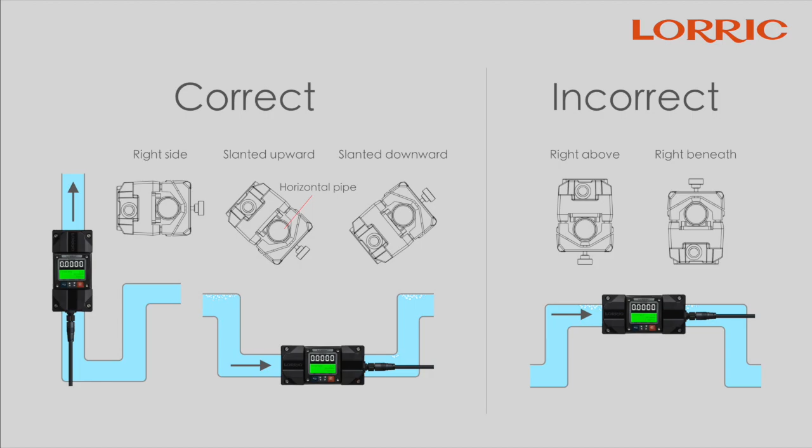First up here is our recommended installation location. During installation, correct positioning is crucial. Whether you're dealing with vertical or horizontal pipes, our Flowmeter has you covered. For vertical pipes, simply choose a pipeline with a flow from bottom to top. As for horizontal pipes, select a position where the pipe is filled, such as a lower spot in a diagonal pipe.

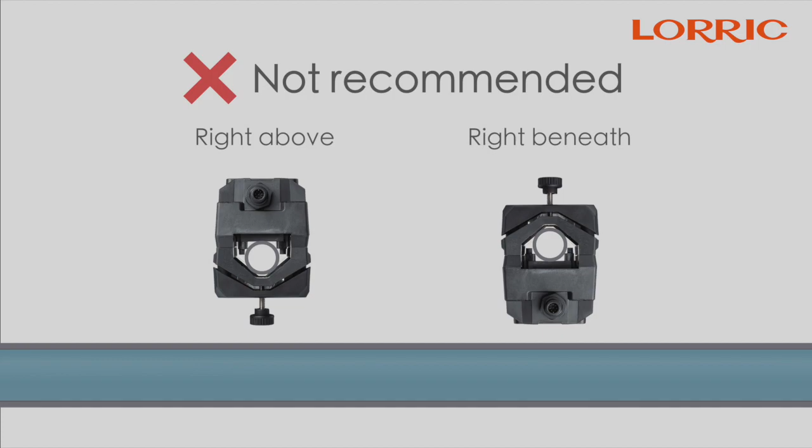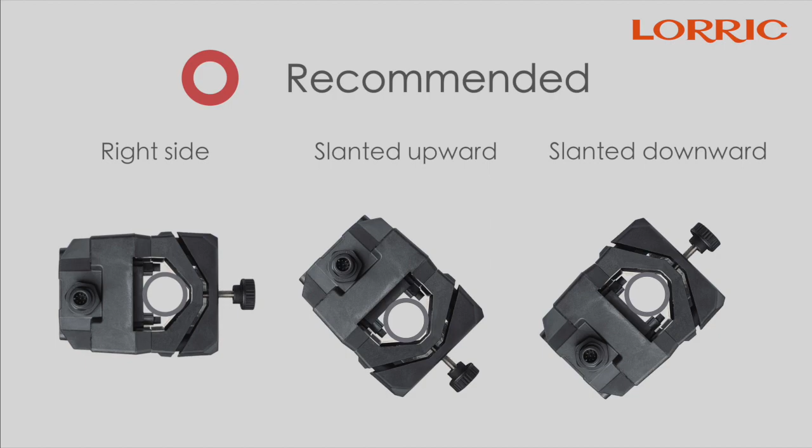Avoid placing it directly above or below the flow to eliminate intrusion from pesky air bubbles and sediments. For optimal performance, we recommend these positions: on the side, slightly above, or slightly below the pipe.

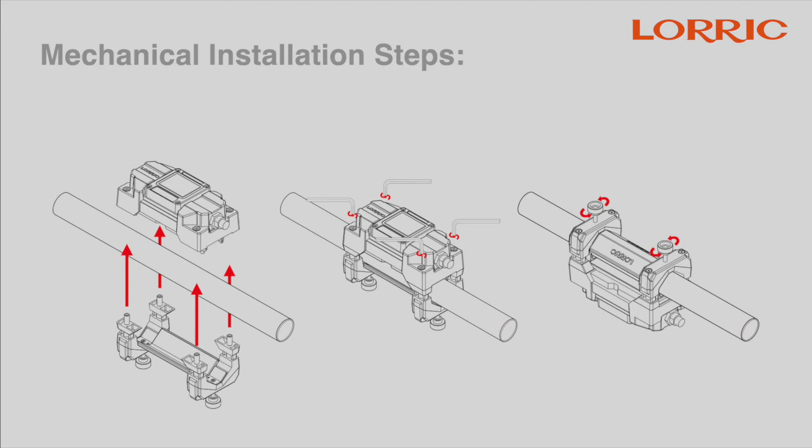Next up here is our mechanical installation steps. It will only take you 3 steps to finish the whole mechanical installation. When installing on larger diameter pipes, remember that the larger the pipe, the more prone it is to deformation. Carefully select an appropriate installation location. Prior to installation, ensure that the clamp is in the loosened position.

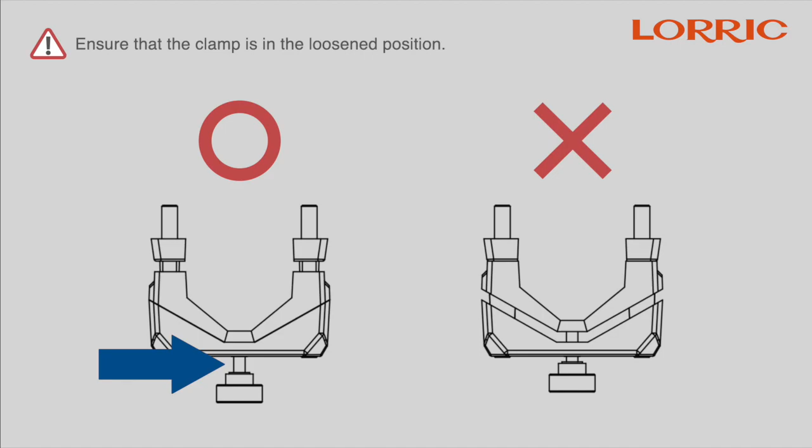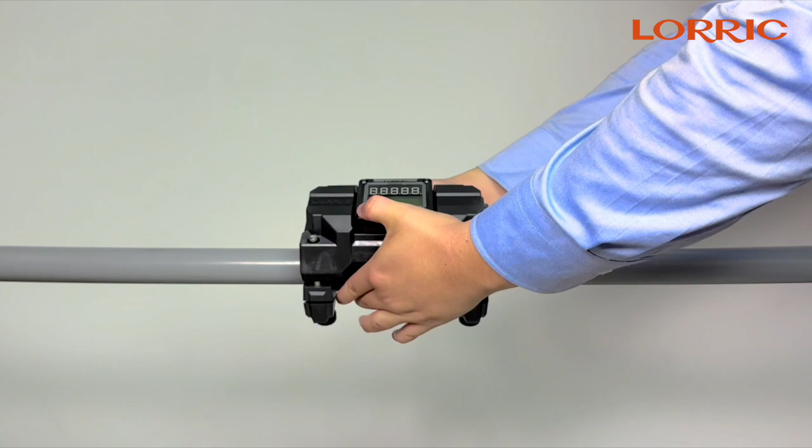Step 1. Clamp. Once you have identified the right installation spot, securely attach the EchoSense Ultrasonic Flowmeter by clamping the upper and lower brackets around the pipe. During installation, avoid applying excessive force to the device body to prevent any risk of damage.

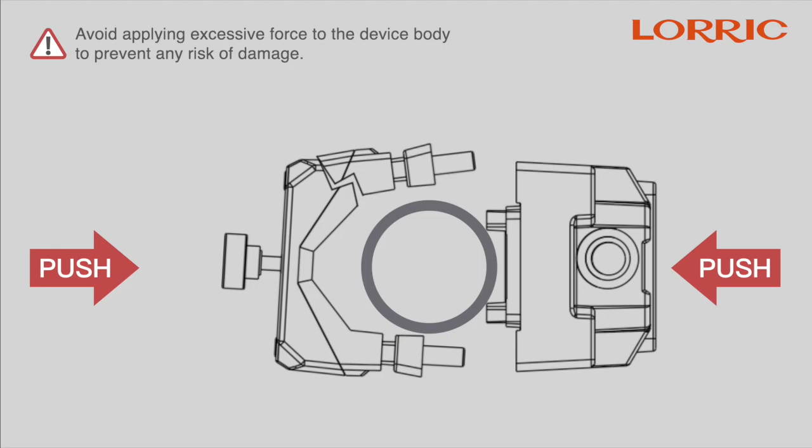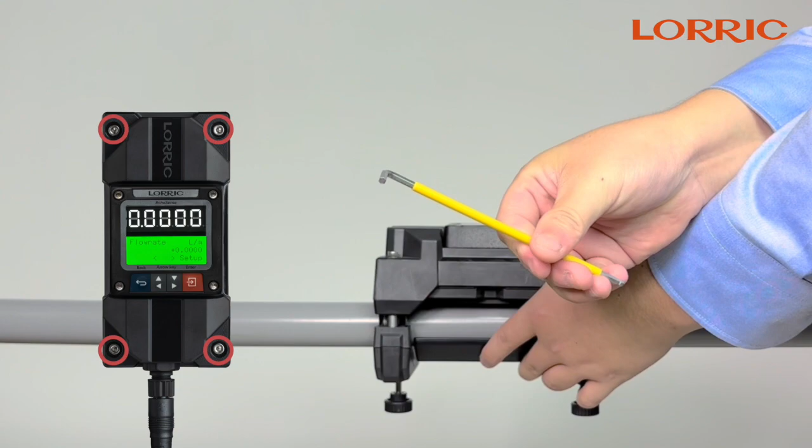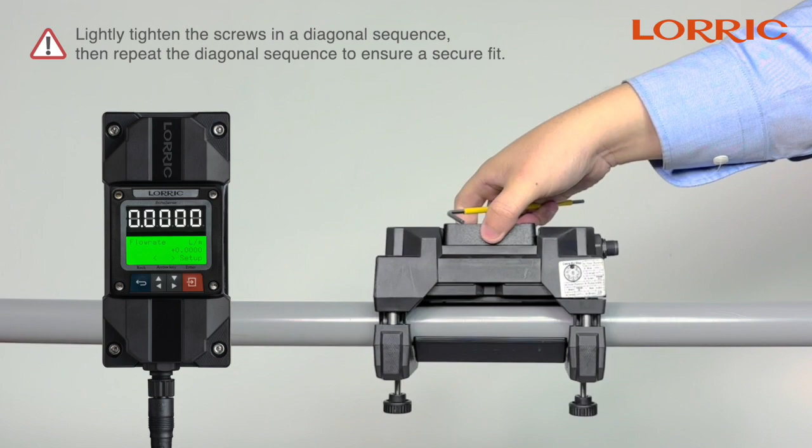Step 2. Screw. Secure the screws at the 4 corners of the upper cover. For optimal performance and even force distribution, it's recommended to lightly tighten the screws in a diagonal sequence. Then repeat the diagonal sequence to ensure a secure fit.

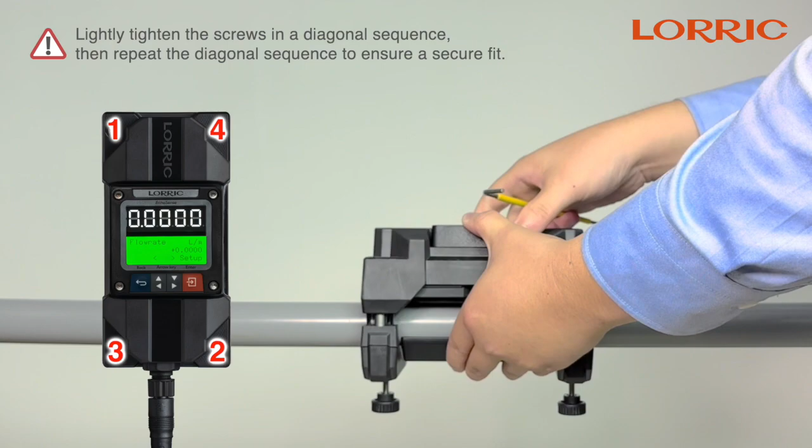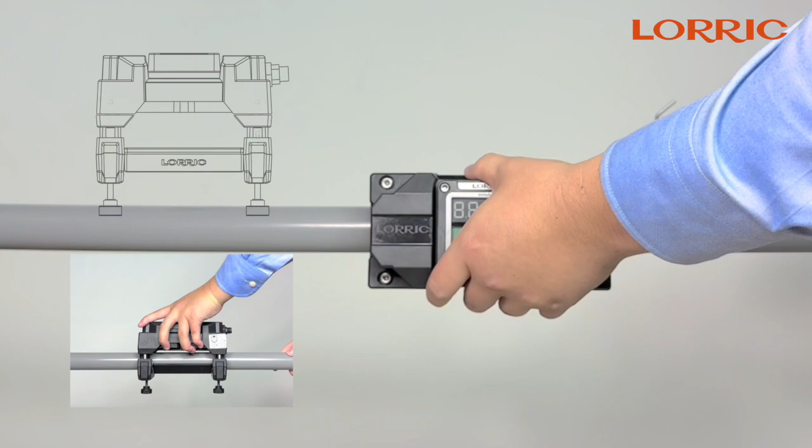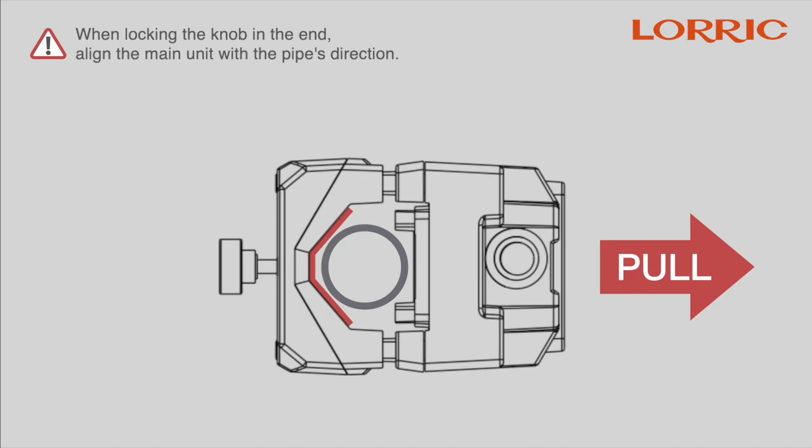Step 3. Tighten. After securing the screws, align the EchoSense Ultrasonic Flowmeter in the recommended installation direction. Pull the upper cover towards the direction of the screen and lock the lower cover knob. When locking the knob for the final time, remember to pull the main unit toward the direction it is facing. This ensures that the gasket adheres closely to the pipe surface, resulting in more accurate measurements.

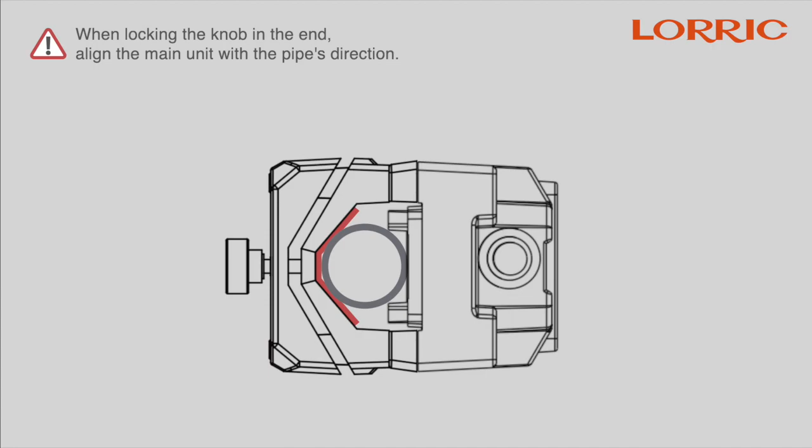After completing the installation, avoid any displacement or twisting of the main unit to prevent the rubber gasket from coming off. That's it! Quick and easy Flowmeter installation onto your pipe.

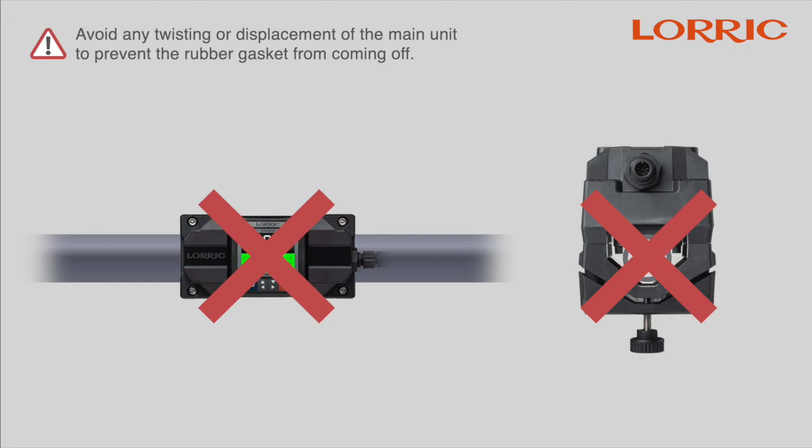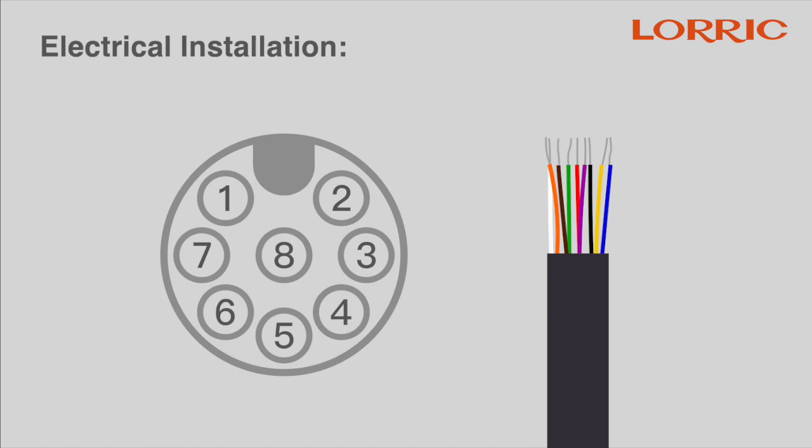Next up now is our electrical installation steps. In order to get our device up and running, follow these steps for connecting the main unit's 2-meter long 8-pin cable to the power source and necessary communication links. You will find a total of 9 different color wires in the cable, with each color corresponding to a distinct function. Carefully connect the wires according to the functionality you require.

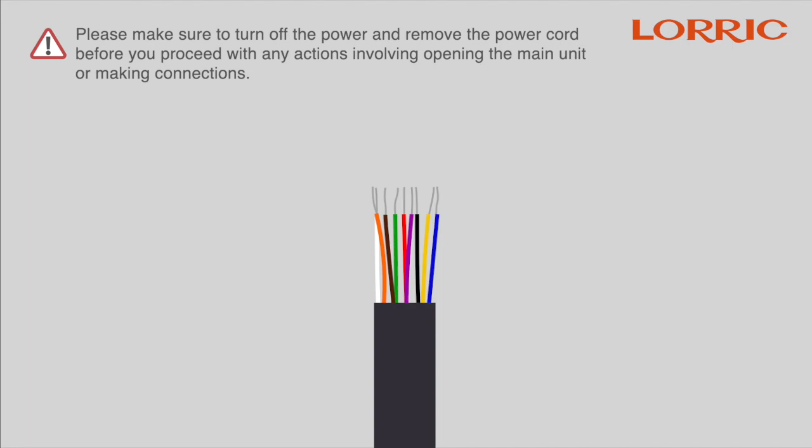For any wire ends that you won't be using, it's essential to protect them with insulating material. This precaution ensures that your main unit remains safe from electrical leakage or short circuits. A crucial reminder: before you proceed with any actions involving opening the main unit or making connections, please make sure to turn off the power and remove the power cord.

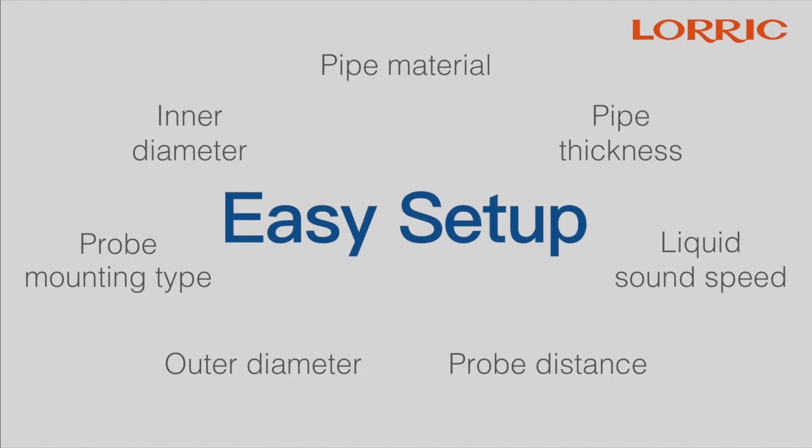And now is the parameter setup to finally start your flow measuring. LORRIC recognizes the hassle of putting too much information on the device just to finish the parameter setup. That's why we have developed a new software feature which we call the Easy Setup that allows the device to automatically detect all of your pipe's key information. You can simply activate this to immediately start your flow measuring.

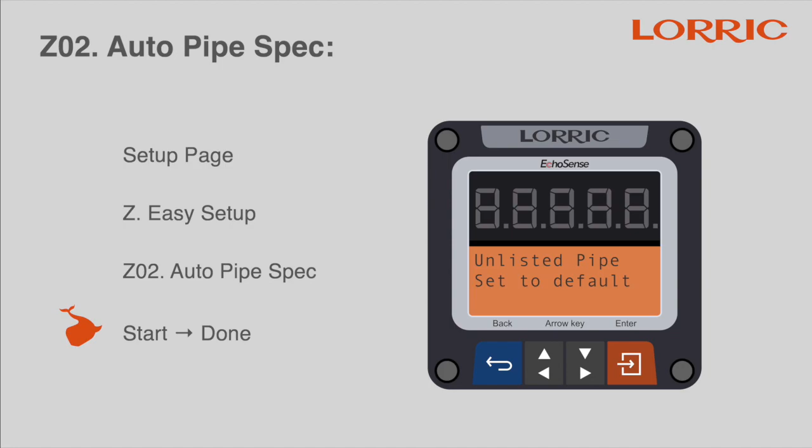Z02 Auto Pipe Spec. Go to Setup page, choose Z Easy Setup, go to Z02 Auto Pipe Spec, click Enter, choose Start, then Done.

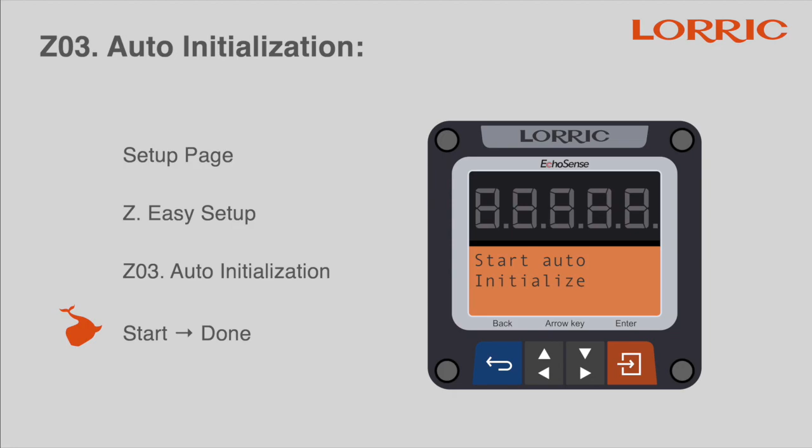Z03 Auto Initialization. Go to Setup page, choose Z Easy Setup, click Enter, go to Z03 Auto Initialization, click Enter, choose Start, then Done. Once you have completed the previous steps, you're ready to start using your Flowmeter. However, if you encounter measurement errors, consider the following actions when the conditions are suitable.

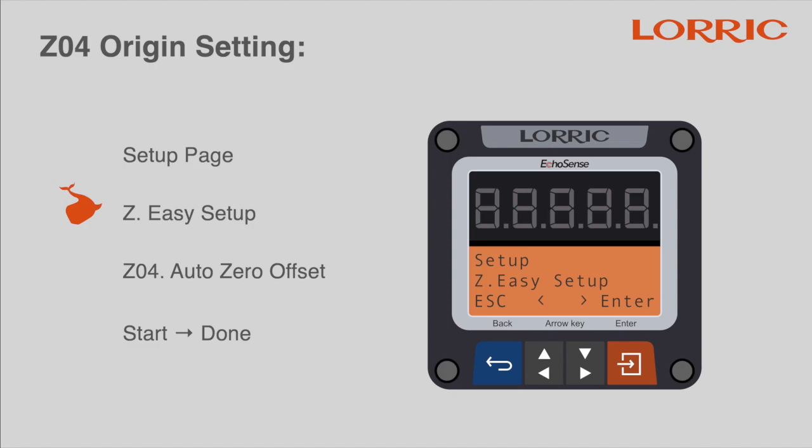Z04 Origin Setting. To enhance measurement accuracy, perform this step when the pipe is full of liquid and stationary. Use Z04 to calibrate the Flowmeter's 0-point signal. Here's how to do it. Go to Setup, choose Z Easy Setup, go to Z04 Auto Zero Offset, click Enter, and then Start. The zero offset process takes about 30 seconds. Then Done.

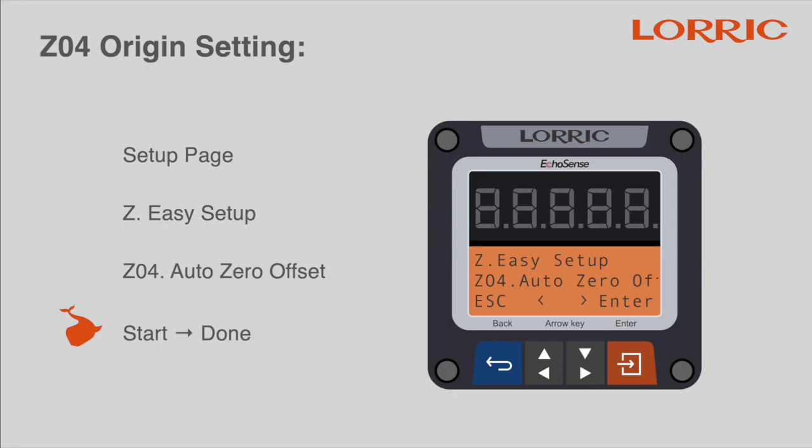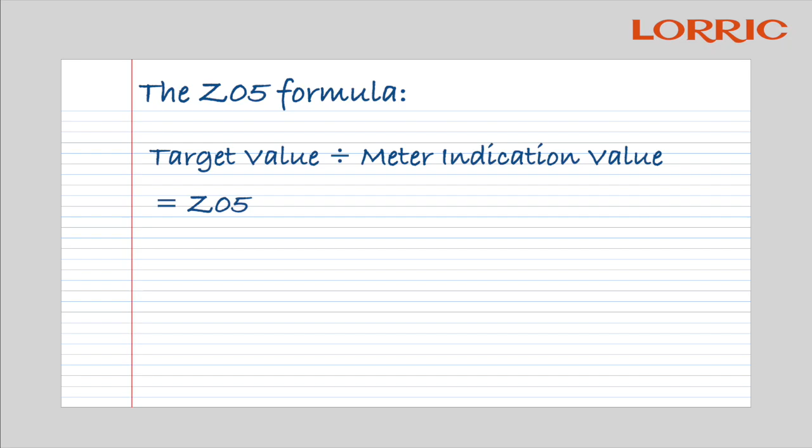Z05 Proportional Coefficient. If you have other Flowmeters available for comparison at your installation site and their readings differ from the LORRIC Flowmeter, you can adjust your instrument's indication value. To do this, use the formula: target value divided by meter indication value equals the value that Z05 should be adjusted to. For example, if your target value is 300 liters per minute, and your current Flowmeter indicates 100 liters per minute, you should adjust Z05 to 3.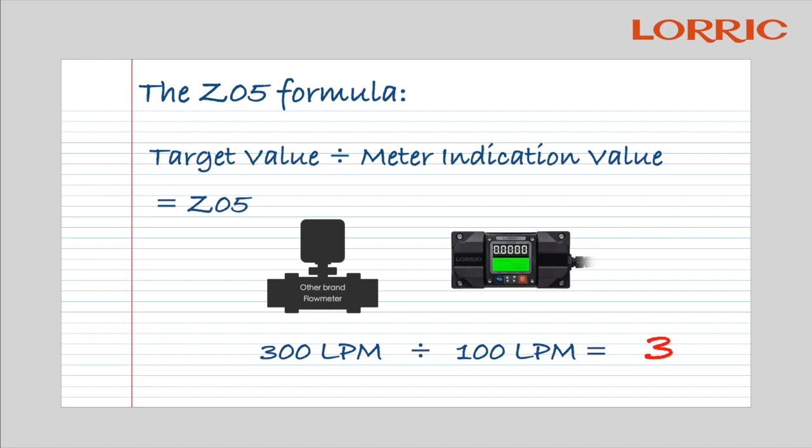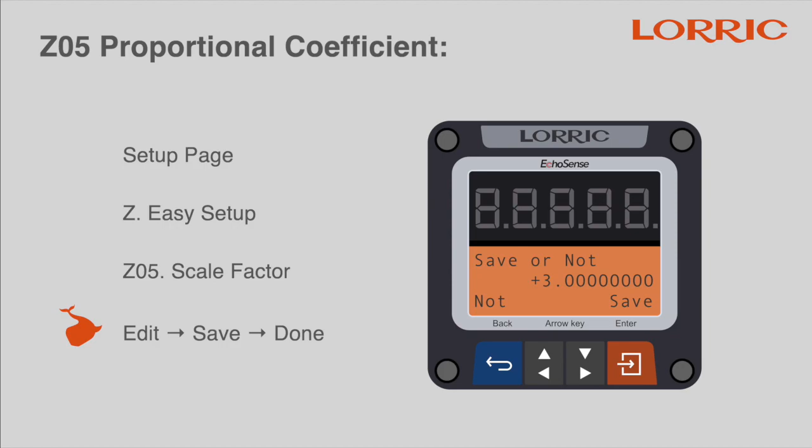Here's how to do it. Go to Setup, Z Easy Setup, Z05 Scale Factor, click Enter, Edit. Input your adjustment factor and save it. Once done, select Save and Done. Following these steps can significantly improve the accuracy of your measurements, especially when you're dealing with low flow rates. You're all set for precise flow measurements.

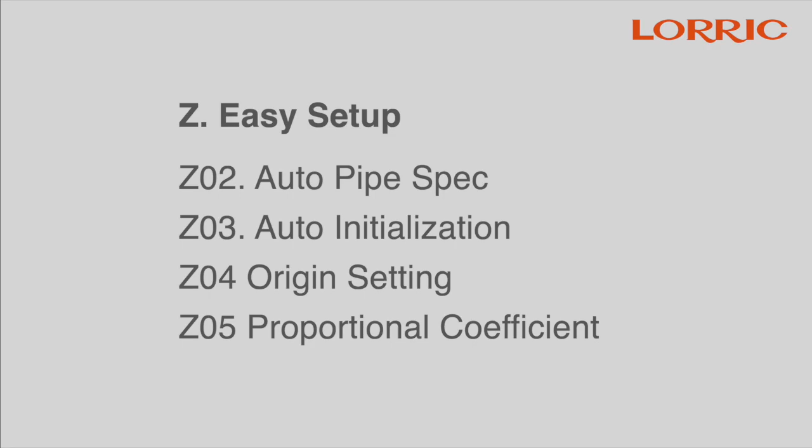Now, your device is ready to provide precise and reliable flow measurements.